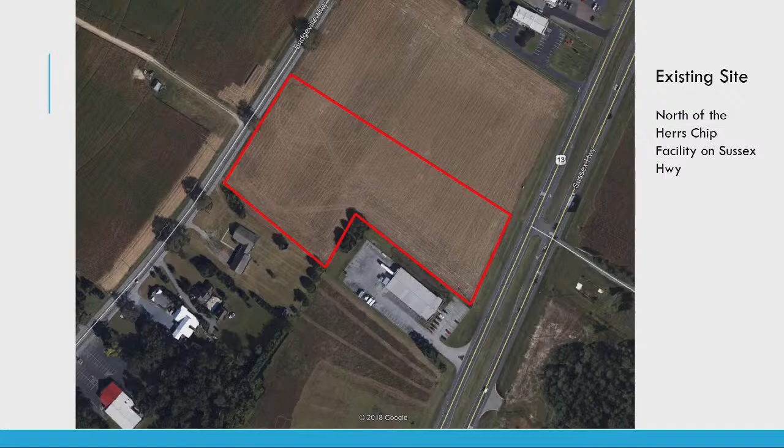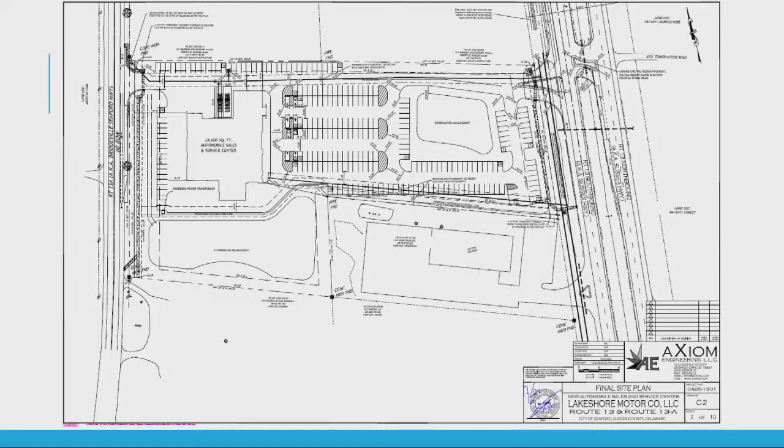This is the existing site highlighted in red there. It's just right next door to the Herrs facility out there on Sussex Highway, just north of town. This is the site plan we received. I don't think there's been any really major changes to it since we saw it last time. Still got all the parking out front for all the vehicles, stormwater on site, the showroom and service center there, it's in the back. Here's a rendering they sent of what the dealership may look like when it's completed. And just again, it's a 24,000 square foot new automobile sales and service center. The building's to be fully sprinklered.

The parking requirement is 1 space per 200 square feet. 120 is required by the code. They're providing 267, so they're way over on the parking, which is good for this type of use. On-site stormwater management will be provided, and it requires the extension of water, sewer, and electric to the site from the city. And they do have most of their approvals already from the Fire Marshal, Conservation District, DelDOT, and the city engineer for the water and sewer extension. I think they're still waiting on some comments on that one. So if there's any questions I can help you, or like I said, Ken's here, he could answer them as well.

Sure, I'll start off with a couple questions. So you're going to utilize the whole lot from 13 to alternate 13, correct? Is that what we're seeing? Yes, the project will have an entrance on each roadway. There's 3 parcels that are being combined. One is behind the Herrs, and the other 2 are front to back, and in that combination of the 3 parcels we would be developing pretty much the entire area. We are still working through state agency reviews and approvals with DelDOT, the Fire Marshal, waiting to hear back from the city engineer. But we've made submittals to all those agencies with the fully engineered package. We just gave you all the summary pages from our set of plans.

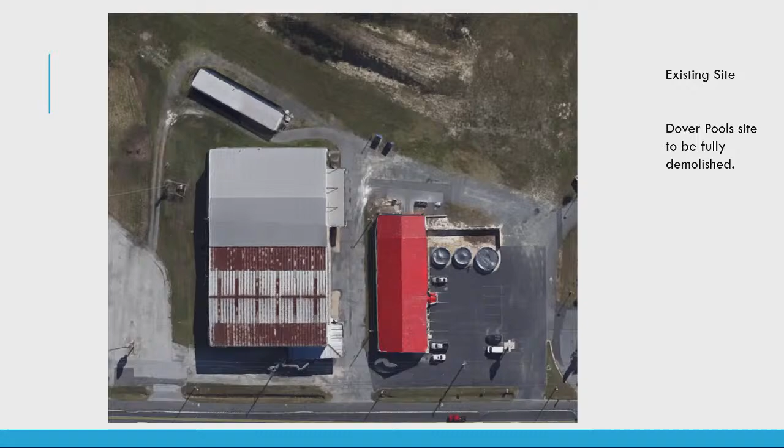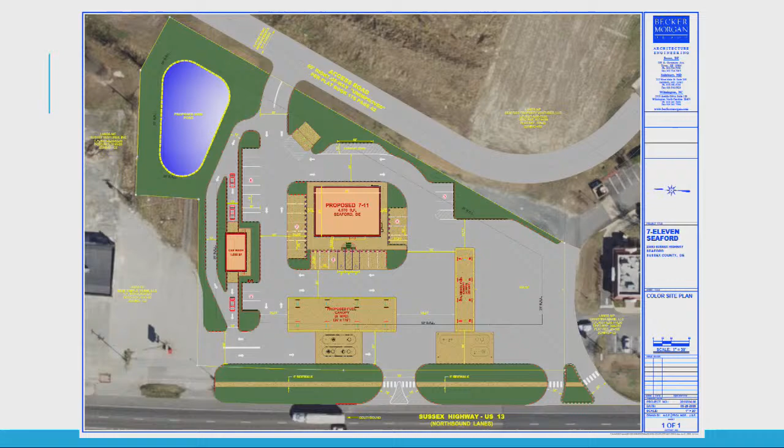So here's the site plan. It's kind of hard to see. The next one should make it a little clearer. This is the one we received. The only difference between this site plan and the one we saw last year is the car wash. Everything else is basically the same. Yeah, I got the full color up on the screen now too, so you can kind of see the green space there, the parking and building and the stormwater on the site. And they also supplied us with a rendering of the front of the building there, what the front will look like. It's very attractive with the block and masonry.

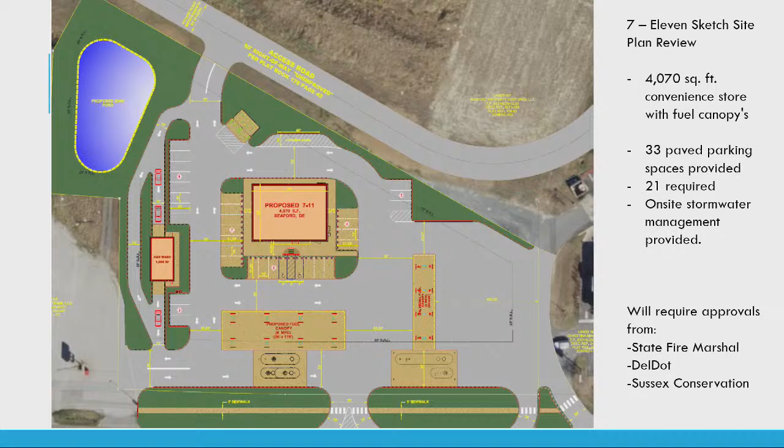So it's a 4,070 square foot convenience store with fuel canopies, 33 paved parking spaces provided, 21 are required by the code. They're providing on-site stormwater management, and it will require approvals from the State Fire Marshal, DelDOT, and Sussex Conservation District for that stormwater system. So if there's any questions, I could help you or Jonathan.

Okay. First question for you, Mike. Yes. So we're going to tie into this access road. You know, that's always the first thing we ask about. So is that a joint effort between the city and these folks to get that thing going, or where do we stand with that? I believe they'd have to approach that developer in the back. It's on their private property, and DelDOT, I think, would have some play in that, because it is going to be a DelDOT road. I think they're in negotiations with some of that. And they are having an easement through the Taco Bell site for now. I don't know when they're going to do that road in the back. Jonathan may be able to answer that better than me. I can touch on the easements.

One question before we get to that. Still with that access road, can this plan move forward? I mean, he's showing an entrance and an exit using that access road. Can this project move forward if that road is not in place yet? I believe so, because they'll have the access through the Taco Bell site with a cross-access easement. But then Jonathan, he can touch on that. Okay, yeah. You can go up there, that's fine.

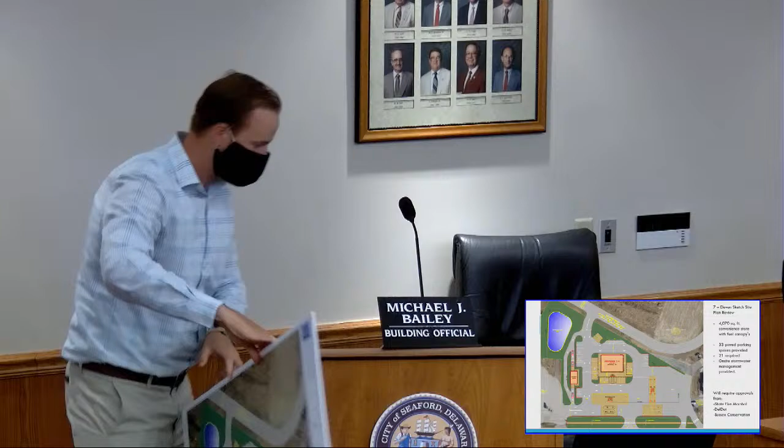So, a couple things that are happening on this. The access road, I believe, is a phase of an apartment complex. It's actually platted as an access road to access the apartments back there. It's not proposed as part of this project. There are several access points. I think we have 1, 2, 3, 4, 5 if that was built. There was a TIS performed that's in its final stages. We have a final draft letter from DelDOT with recommendations for those access points. Really no off-site improvements, but they did have several recommendations for the access points that are reflected in this plan.

One was sharing the right in, right out with Taco Bell, and Pentex has acquired that easement. It's actually been finalized, I think, just today. That easement there for Route 13, and then DelDOT had requested one that ran along the Taco Bell property and connected into the part of Preservation Drive that is built. So that easement will be in place, and you'll have that access all the way through the site without the rear one. We did add the rear one just in case that access road is ever built. We could stub at our property line, and then they would build to us. But we weren't planning to build out that entire access road.

I have a question, I don't understand. So this right here, is that where that hits that road behind Taco Bell?

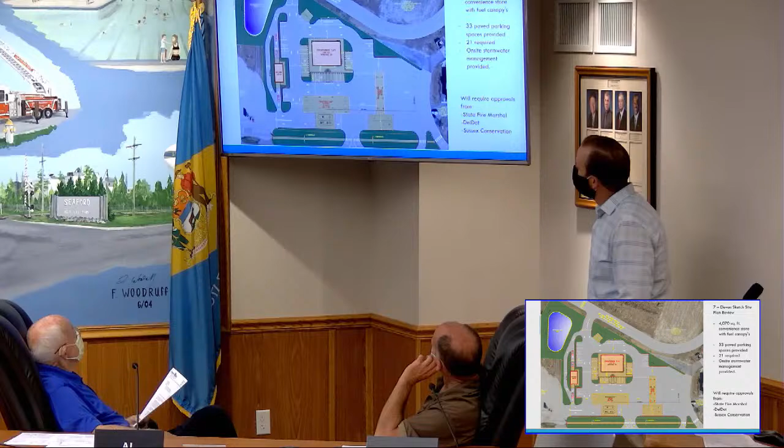The sidewalk connection, sidewalk along the frontage, of course. And it's not shown on here, but I think we plan to add a connection from the frontage sidewalk into the site. It's not shown on here, but I'll note that we'll add that. Stormwater management in the rear, it's shown blue, but it's not going to be a wet pond or anything like that. Back to the mic, it's probably hard to hear me with the mask on. But the stormwater area in the back there is most likely going to be a dry infiltration basin. We got good rates, and groundwater is pretty low.

So I feel like you got a pretty good sized store here, in relationship to other types of stores in the area. Mm-hmm. And you don't feel like you need that rear access necessarily. You're just giving that as an option at a further point. Right. I mean, it gets crazy out there on the highway. That's why I'm asking these questions. Right, we have several access points on the highway, but we figured build it, and if that developer can move forward with that project and build Preservation Drive extended, then we can easily connect to it. We'll just provide one more access point. Okay. All right, that satisfies my question.

How many fuel stations do you have? This one has diesel and unleaded, so there's eight unleaded. I think there's 8 of each. And that will facilitate the large trucks? Yes, so not shown on this plan, but we have run our turning software for fueling trucks for both customers of the diesel, the large WB 67s. We've run that to come in that Taco Bell entrance and come back out to the highway. So the larger trucks for the diesel, and then delivery trucks for the unleaded is a smaller truck. But we've run both scenarios to make sure those entrances are sufficient and internal circulation.

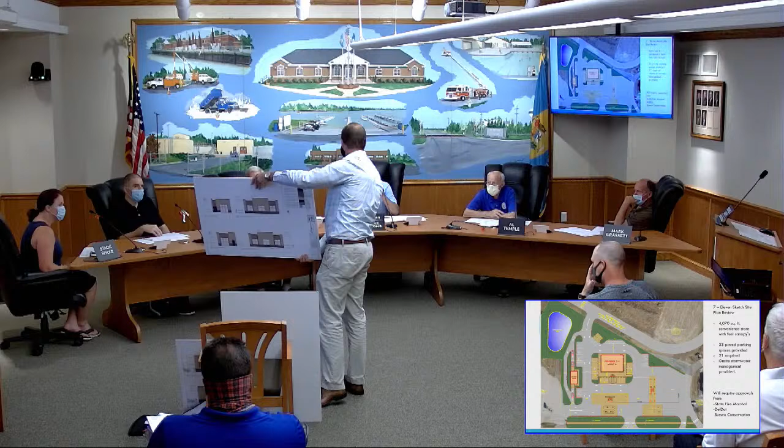Then there were some elevations, you saw one. I have some others of the car wash, it looks very similar. Not some of the cheap greenhouse looking car washes you see, so very similar in look and feel. Everything's just nice stone. And back, the diesel and unleaded fuel canopies will be stone and brown with the 7-Eleven, not shown on here, but it'll be the 7-Eleven signage. Right. You can submit that signage.

Is that sort of the new concept for you guys? Because I feel like I haven't seen one that looks like this yet. Yes, this is kind of rebranding, if you will. More of the Royal Farms, Wawa, Super Centers. I mean, these aren't typical 7-Elevens. We're doing several of them throughout the state. We got one approved in Bridgeville. Okay. And it's a nice looking model. They're definitely stepping up their architecture and their business plan. Okay. All right, thank you.

So, I don't know, sir, I maybe overlooked you last time when I said there wasn't any public, but... No, I'm with Dover Pools, actually. Oh, you are, okay. I'm sorry. So, move forward. All right, so we don't have any public.

So we'll keep moving then. All right, move on to item number 3, Delaware Properties Ventures LLC. Property is located on Park Avenue in the industrial park. Tax map and parcel is 331-10.00-236.10. The zoning is M1 Light Industrial. They're requesting a final plan review for a proposed 5 warehouse development with parking and site improvements. Mark Strickland is here representing the project this evening, if there's any questions later on. So I think this is the second or third time we've looked at this one. This is the final. This existing site, it's right at the end of Industrial Boulevard there on Park Avenue. It's a very large site, but they're proposing 5 flexible warehouse spaces on it.

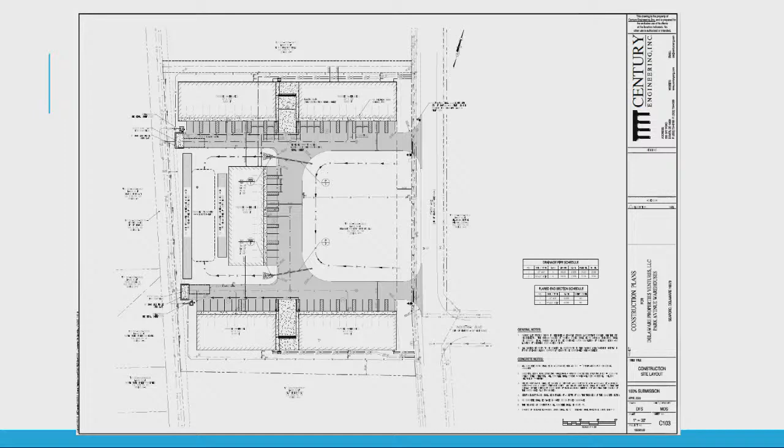Here's the plan. They've got 2 warehouses on the north and south ends and 1 right in the middle, with on-site stormwater as well. And in the middle of the 2 warehouses on the north and south property lines there's a covered loading dock for the complex to share for unloading and loading trucks. It's a little bigger view there.

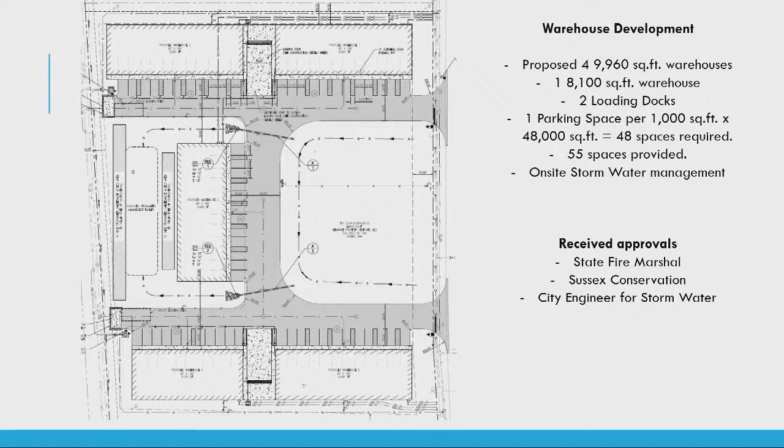So they're proposing 4 9,960 square foot warehouses and 1 8,100 square foot warehouse, 2 loading docks, and the parking requirement is 1 space per 1,000 square feet, and that is required to be 48. They have 55 on the site provided. They're doing on-site stormwater management, and they have received their approvals from the State Fire Marshal, Sussex Conservation, and the city's engineer for the stormwater. If there's any questions for me or Mark?

Okay, I don't have any questions on this one. Does anyone else have any questions? I'd just like to say I appreciate the conversation between the engineering group and the fire chief of adding the extra fire hydrant into that location. It was kind of tense there for a little bit, but they did agree to put another fire hydrant in the back. Okay. All right. We'll make that noted for the council. They did a very nice job.

Yeah, thank you. Hey, Mike. All right.

So at this time, I'm going to close the public portion of the meeting, and then we're going to open the regular meeting back up. So we're going to findings of facts for item number 1. It was Lakeshore Motor Company LLC, located on Sussex Highway. That's tax map and parcel 331-3.00-193.00, 193.12, and 193.13. The zoning is C2 Highway Commercial.

It's a proposed development of a 24,000 square foot new automobile sales and service center. They're providing 267 parking spaces, and 120 are required by code. They're providing on-site stormwater management and it requires the extension of city utilities, water, sewer, and electric. And the required approvals are State Fire Marshal, Sussex Conservation, DelDOT, and the city engineer. Planning and zoning is to make a recommendation to council this evening. Okay, at this time I'll entertain a motion. I recommend approval of the preliminary site plan review for Lakeshore Motor Company as presented in tonight's finding of fact.